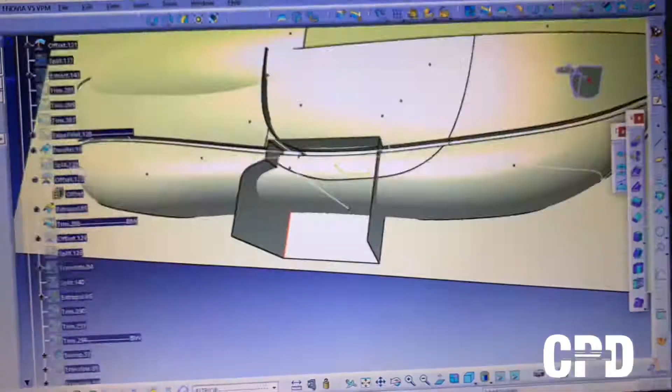Okay, for those joining us on this channel, this is the project of the E-type, my own take on it. Started with an idea, and here it is being fleshed out in CAD, and then we're going to make it out of 3D printing, laser cutting, and many other techniques that we're going to learn during the next few videos. Enjoy!

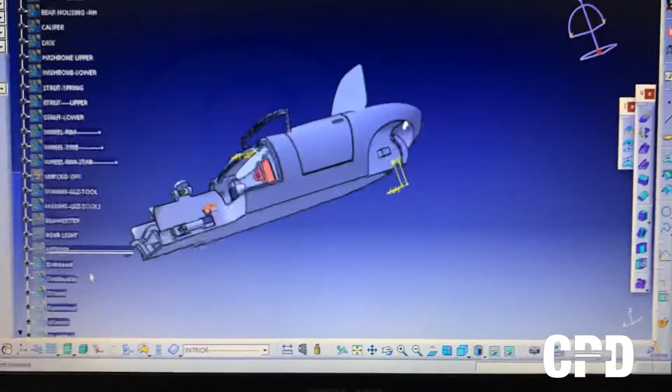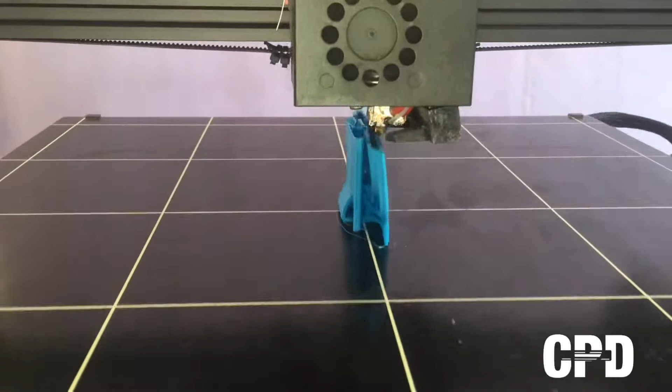The thickness here is 1.5 mil, maybe you can go 2 mil. Any more than that, I think it's a waste of material. Depends on the size, obviously.

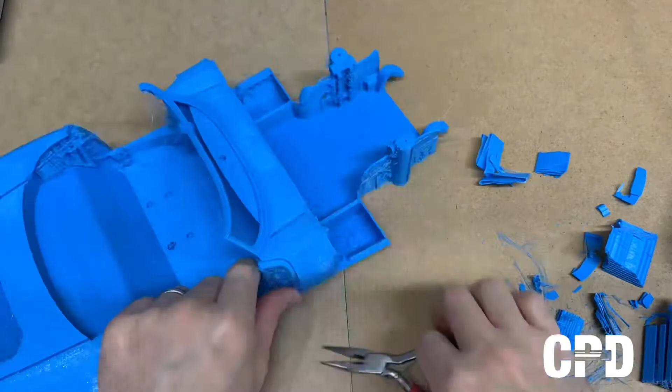I think this is the biggest part. It took about the best part of 3 days to print.

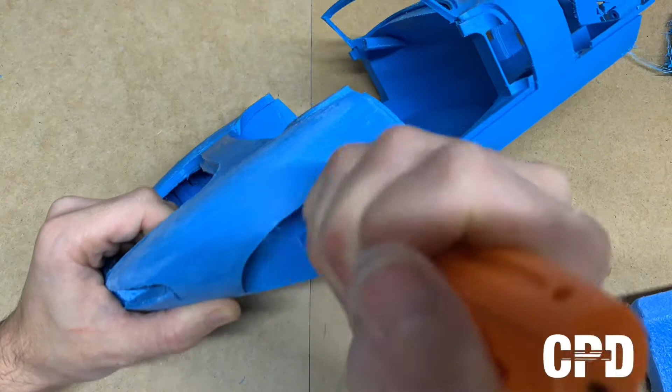The grit used here is 80, maybe 100 would be okay too.

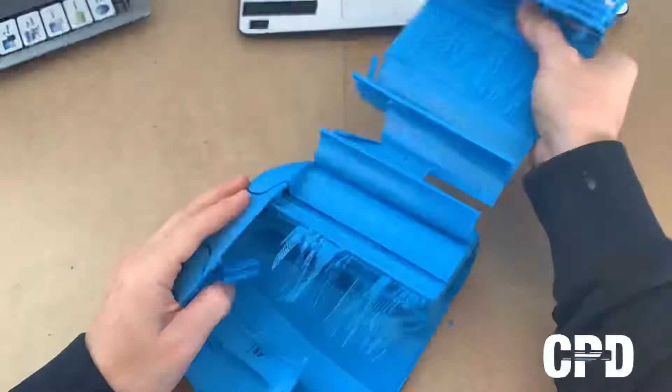I have used sandpaper attached to a flat pad like that to sand it down to a nice curvature.

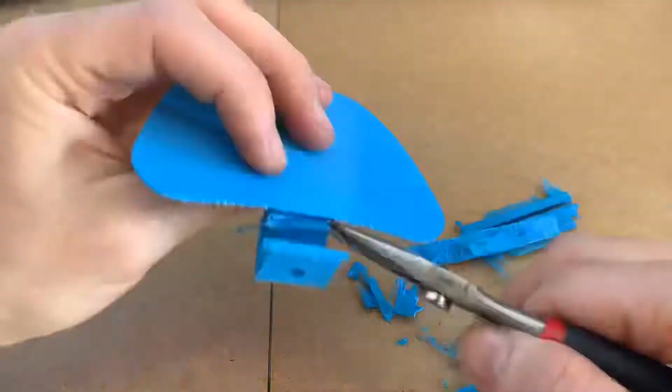I'm using an Anycubic Chiron 3D printer to do all this project. Almost all parts of this project have been printed at 0.2 of a mil thickness high.

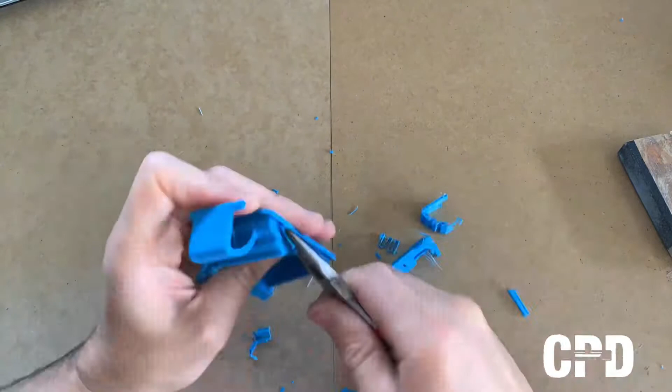The finer you can get the sanding, the better result you'll get, the less work you'll have to do with the primer later.

At the top left, preparing the hinge. Here, attaching the hinge for the door is a simple snap into place.

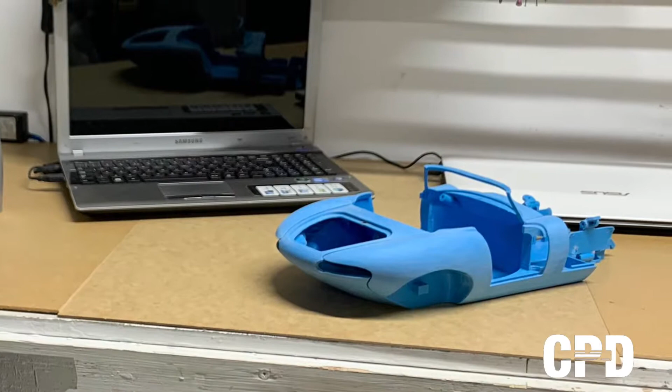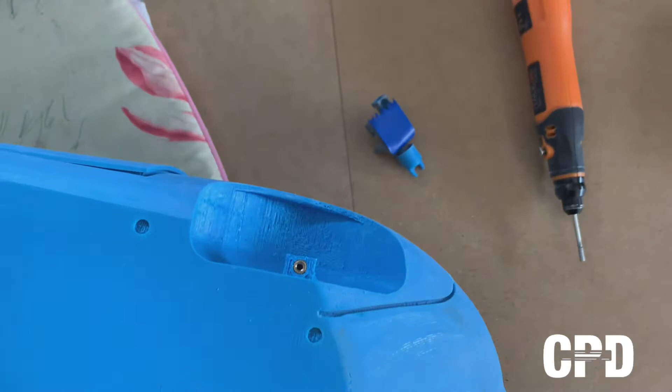Moving on to the front suspension, creating it in CAD.

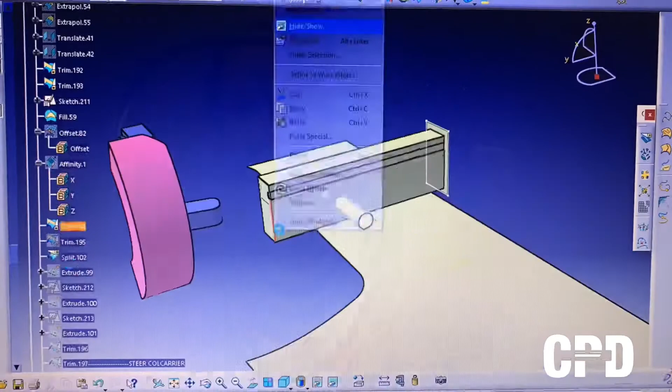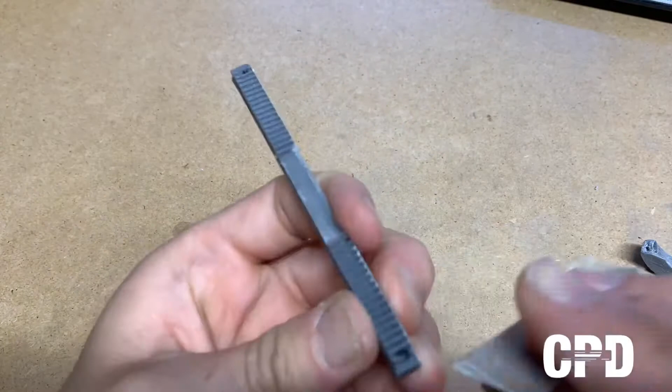If you notice, there is a teeth on this steering rack on both sides. That's not to do with left-hand or right-hand driving. It's only to do with if you want to insert it left or right, it should be fine. It should work both ways.

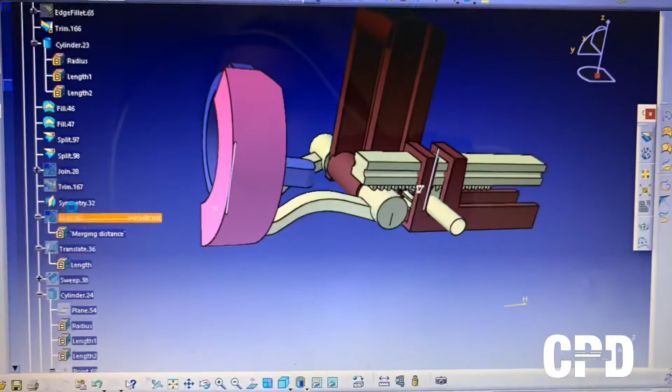Now this is the front suspension. Eventually I opted for no spring, none of that stuff. In fact, it's just a normal bolt-in situation, because it's all hidden, it doesn't hinge out, it doesn't show any of that, so there's no reason for me to go onto that length.

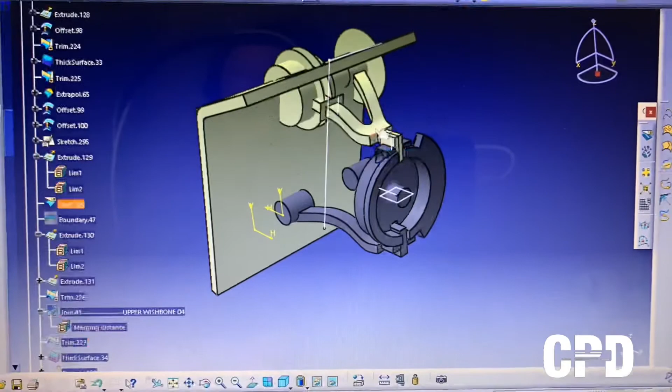After creating all those suspension components in CAD, we moved on to 3D printing them. This feature of a 3D printer is quite cool. You can actually select to print all at once, so the printer will print the whole thing in one go, or it will print one at a time.

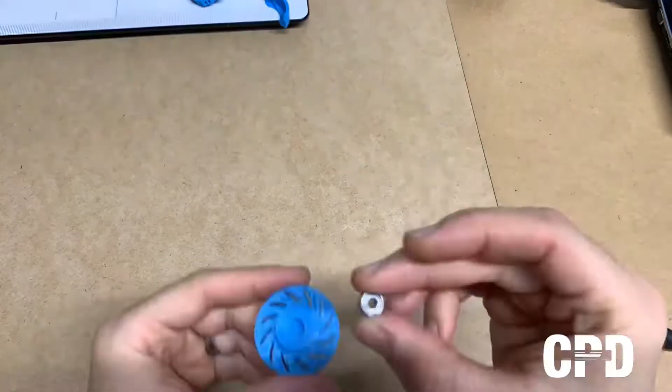Here we're preparing the brake disc, the caliper and some other components for the dry fitting.

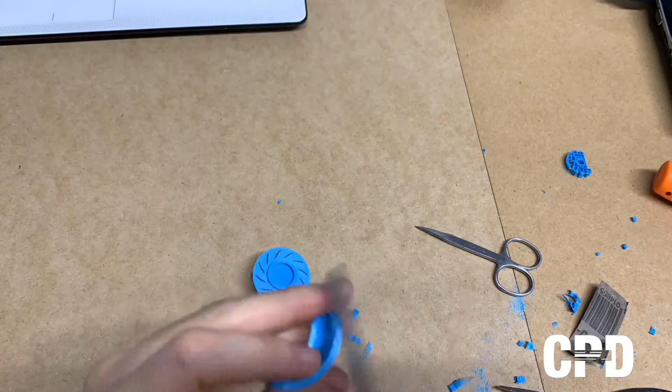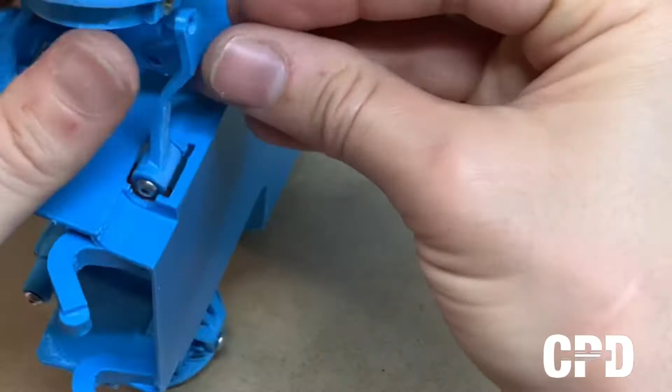Notice the two inserts on top and bottom of the wheel hub. Use the same iron technique to insert them in, with some cooling water eventually.

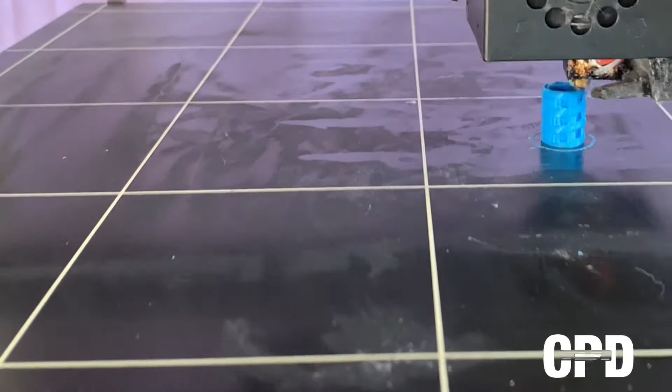Now 3D printing the rest of the suspension components. Those coils or springs have been printed with a little bit of support in between. You delete support later and you end up with a nice springy action on them. You'll see in the next video.

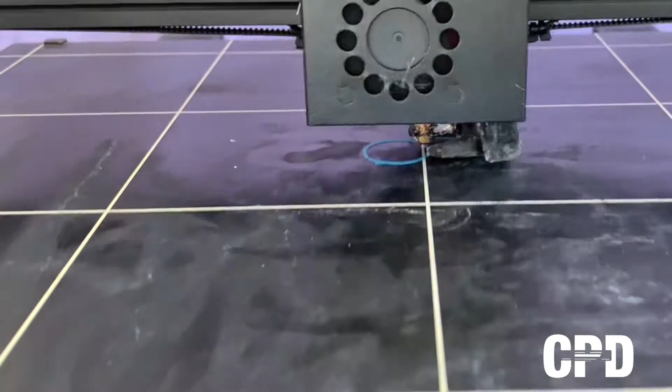Here removing the support material and cleaning it up a bit with the tool, rotary tool, and some sandpaper, and it should be ready.

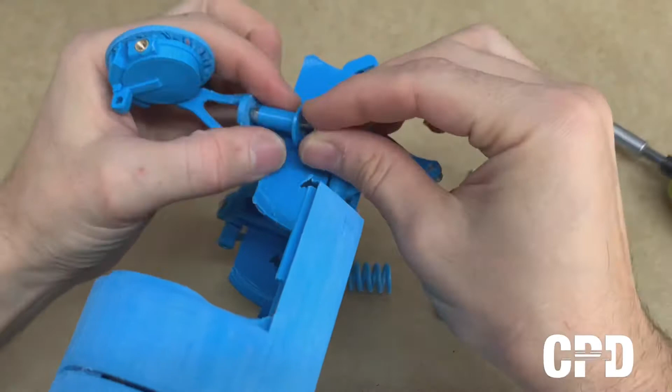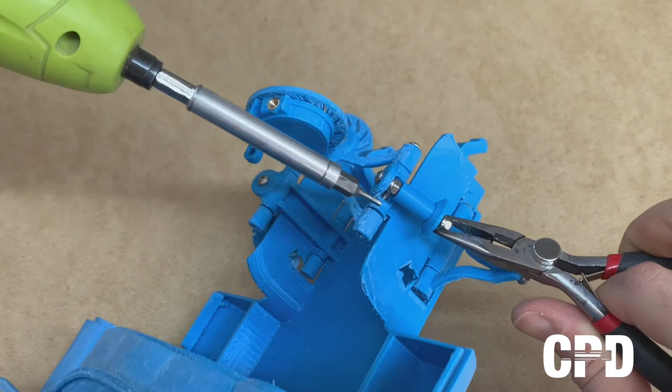I hope I didn't break anything there.

Lovely. Lovely, that's the action we're looking for. Oh, this, I need to glue this later, it's just for now, for look-see. Right.

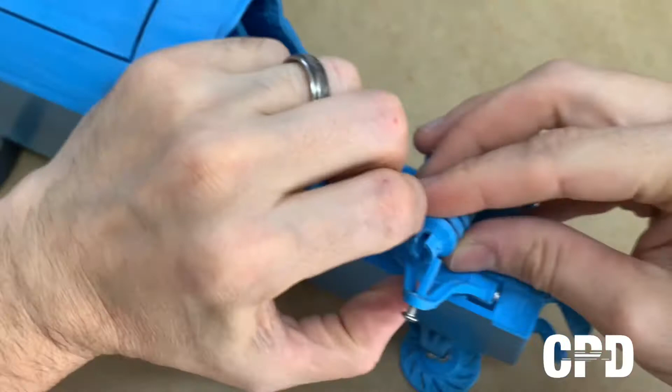Last but not least, turn this the way around. This way around, and look for the spot.

And eventually we're going to have some Loctite in here to catch the screws. There we go. That's the wheels.